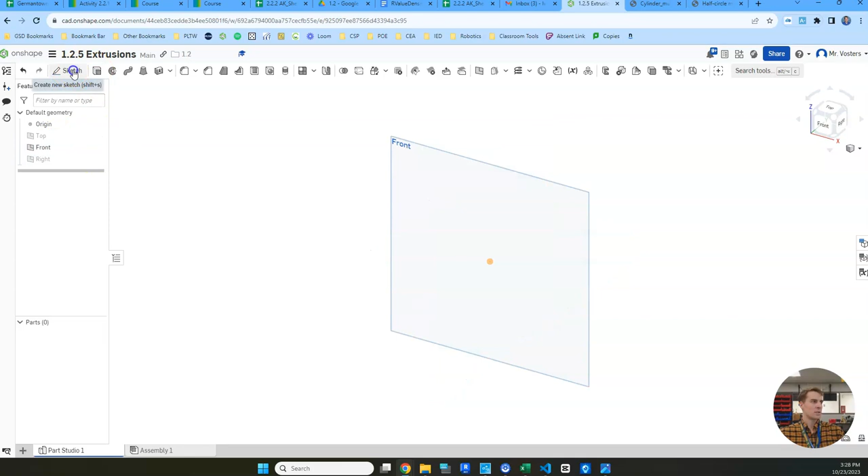I'll click up here, sketch, and we're going to do that on our front view. I'll go ahead and hide the front view now, and turn our view cube towards the front view. From here, let's jump back to our dimensions. We're going to draw a rectangle that's 2.25 tall and 0.5 wide, so it's only going to be half of our diameter, and you'll see why in just a second.

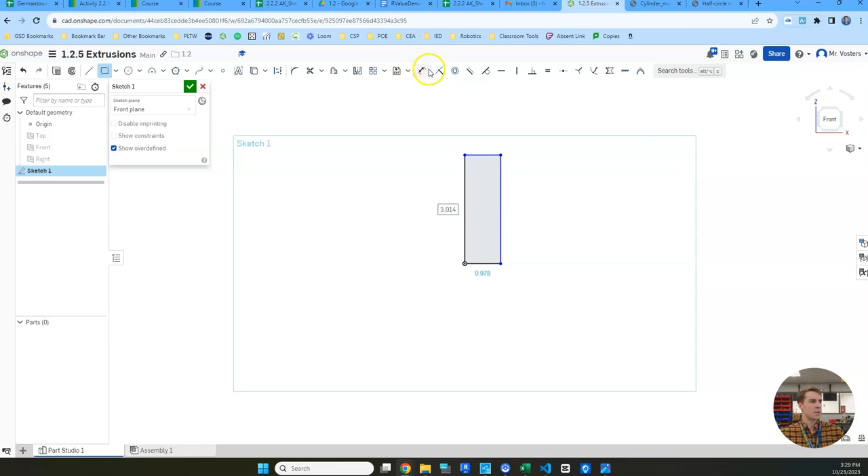So we're going to do a corner rectangle from the origin. We want it to be 2.25 tall and 0.5 wide. I need to find my dimensioning - we're going to dimension this to be 0.5, and the height is going to be 2.25. Let's double check that: yep, 2.25 tall, and we want half of this 1 inch, so half an inch, which you can see right here.

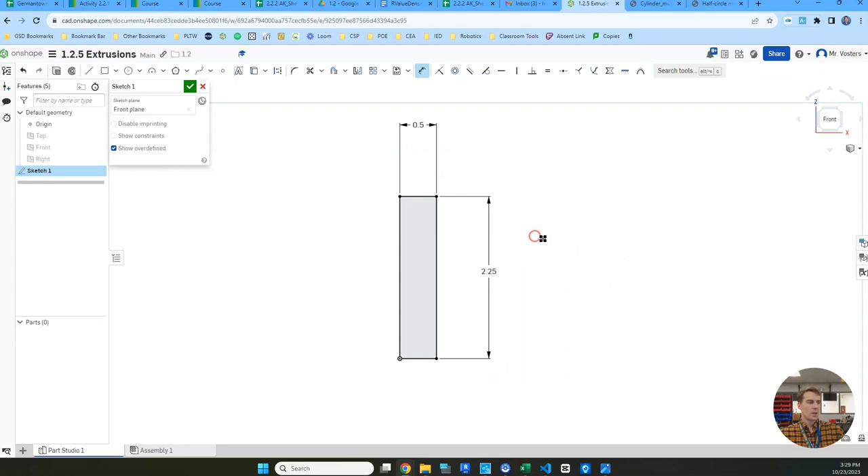From here we're going to go ahead and click Done. If we go to our isometric view, remember that's Shift 7 on your keyboard, or you can use the view cube to spin to this corner, whichever one you prefer. We've got our little rectangle, and if I rotate, you can see it's just two-dimensional, so it doesn't have any depth.

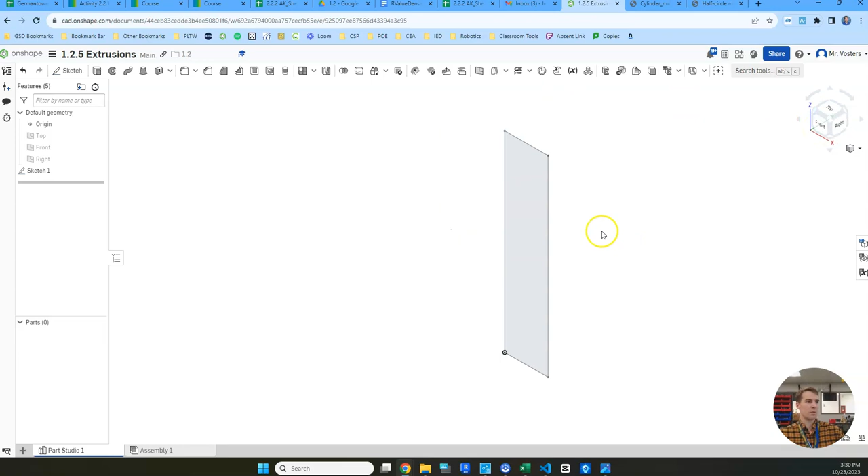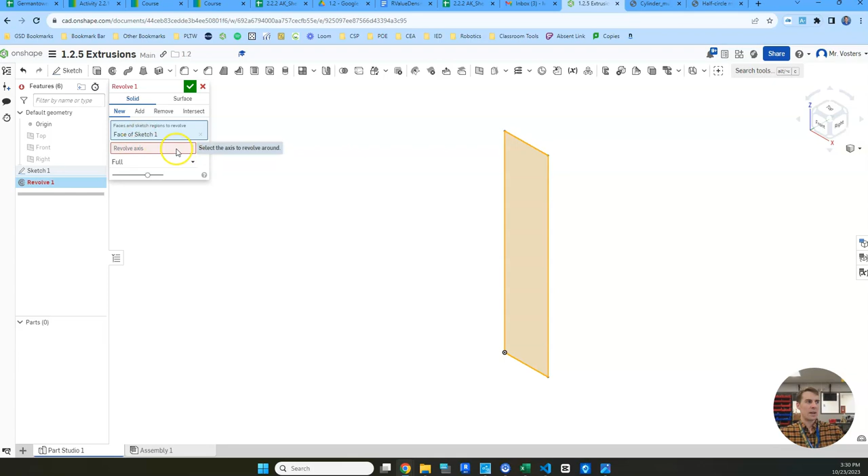So you're probably wondering how you're going to turn a rectangle into a cylinder, and that's using this revolve tool - that's Shift W, or you can click on the little symbol in the top left here, right next to your extrude. From here we're just going to click on the face that we want to revolve, then it's going to ask us to select the revolve axis, so we click over here, and we can revolve it around any of these sides of our rectangle. We want to revolve it around the one on the left that's going through the origin, and you'll notice when we do that, we do get a cylinder as a result.

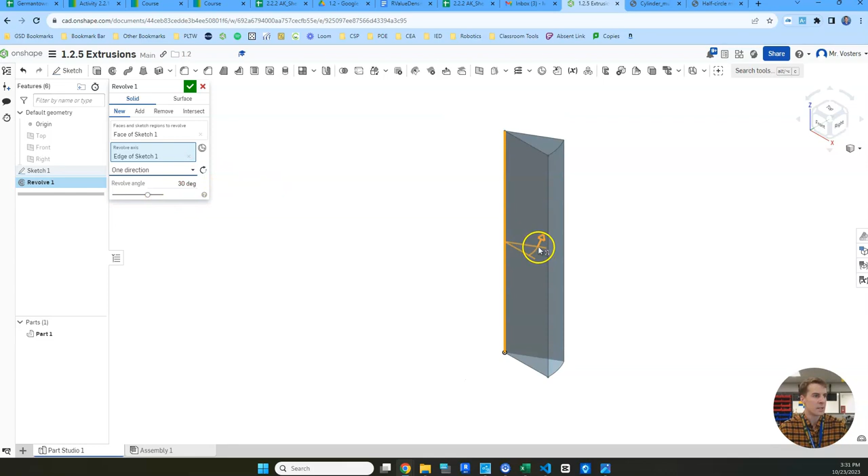So let's break down what's happening here. We've got a couple different options for a revolve. Right now it's a full revolve, meaning it's doing a full revolution around that axis. If we go one direction, this might help you see it better - starting with like 30 degrees, we can see we just have a little sliver of a cylinder. As I increase the amount of degrees, you can see that rectangle is being rotated around that middle, which is really the left side of the rectangle, and it's creating a three-dimensional shape, which is a cylinder.

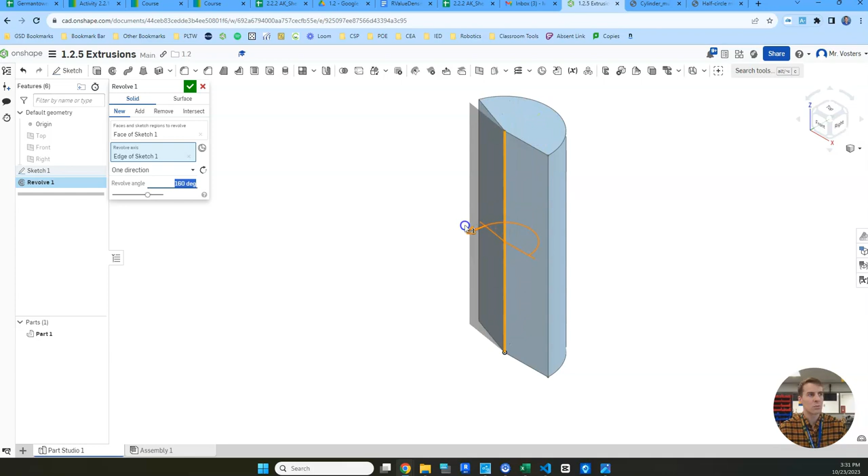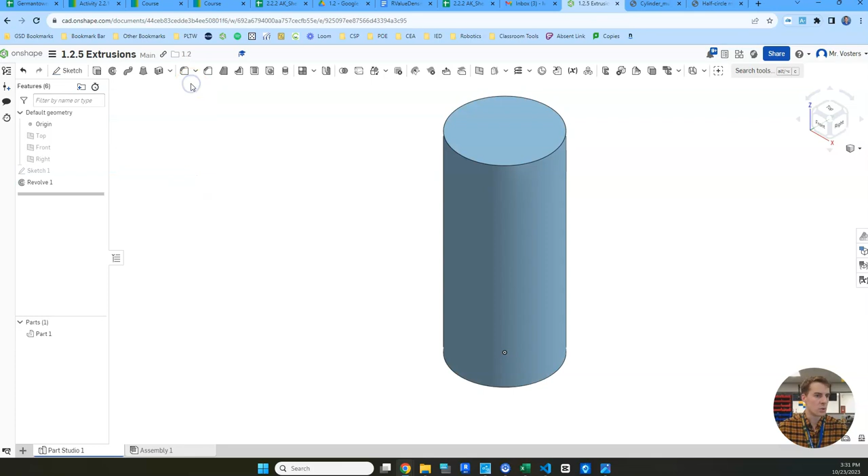As we increase the amount of degrees all the way up to 360, and I can type that in, it's going to close it up for a full cylinder, or I can just switch it back to the full option. Either one will do the trick, and we can click our green check to complete it. So we have our cylinder, nice and easy - a little bit easier maybe to do it the old way, but...

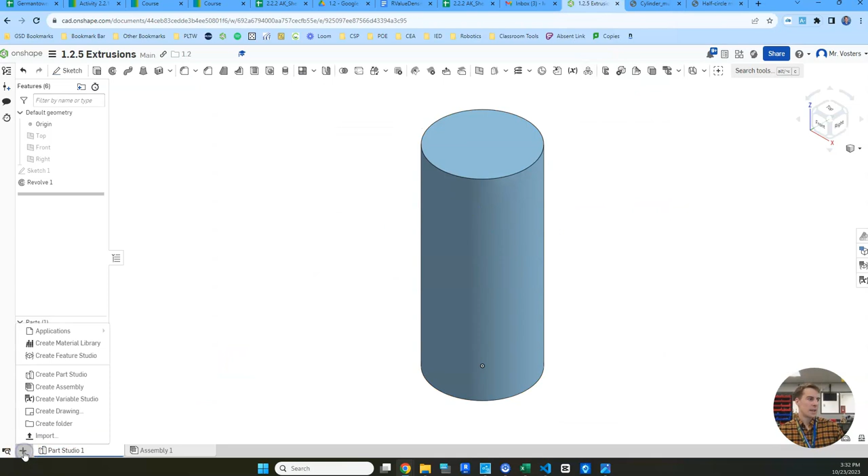There is another shape I want to create - now that's the half circle. This one should be also fairly easy to do with the revolve, maybe even easier than the original way that we did this one, where we had to extrude a circle and then cut the bottom half off with a rectangle. So I'm going to create a new tab - we're going to create a part studio, and that's going to be our half circle.

While that's loading, we need to think about the technique we're going to use here. What I'm thinking is we create a rectangle that goes flat, and then we can revolve it around this axis, which is the left side of our rectangle, in a circular pattern, half of a circle, or 180 degrees.

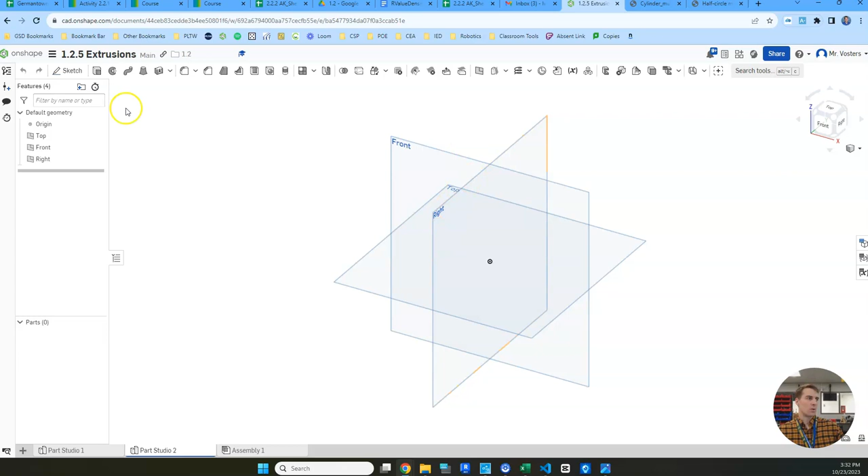Let's hide our front and right views. We said we were going to do a rectangle on the top view, so I'll do sketch, click on that top view, the top plane, hide the top plane, and then start on our sketch. I'll orient the view cube to look at the top, and we're going to create a corner rectangle.

I'm just going to make it a nice rectangle shape. Our dimensions for this one: it's going to be 1 inch tall, and then half of 0.75. You may not know that calculation right off the top of your head, so I'll show you a little trick you can use in OnShape.

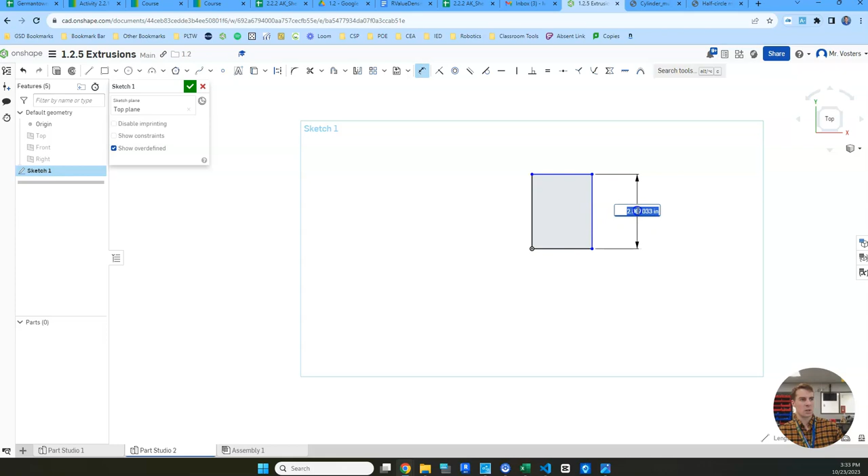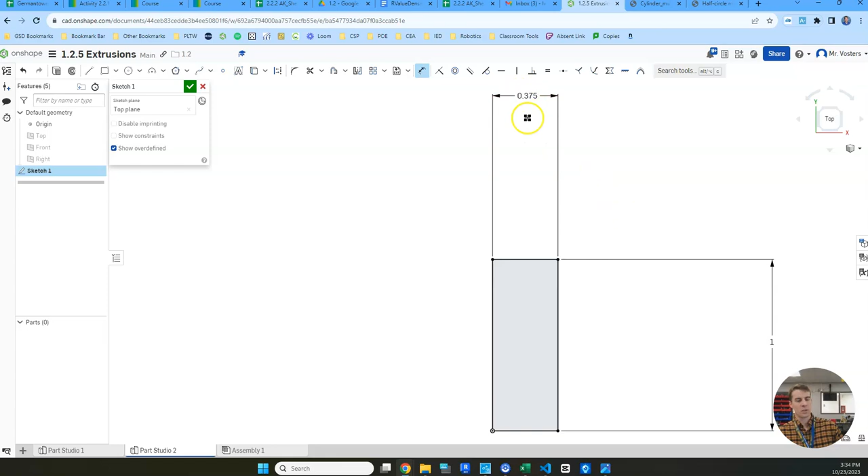We said it was 1 inch tall, and then half of 0.75, so we should be able to do some math in here. If we do 0.75 divided by 2, using the forward slash as the divide symbol, it should automatically update to calculate that number, which is 0.375. That's a nifty tool you can use if you don't want to do math or pull out a calculator. OnShape will do the work for you.

So we've got our rectangle the way we want it. Let's finish our sketch and go to our isometric view. We can see we've got our flat rectangle, which should be imitating this little section here, and as we revolve it, we should see a half circle emerge.

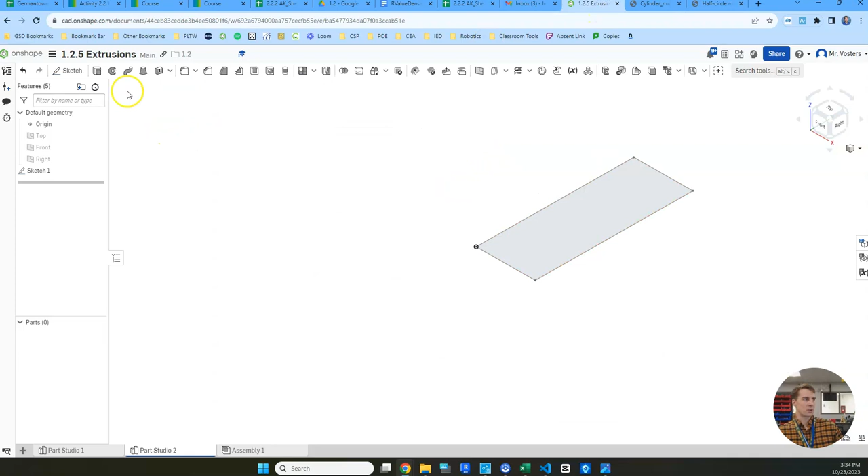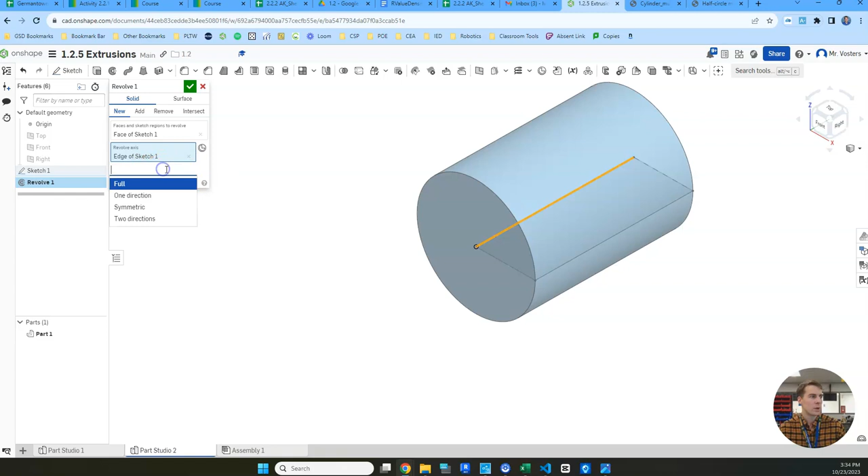I'll click revolve, and then click this rectangle since that's what we're going to revolve. Now you might be wondering why you can't click that edge - you need to click this first. Click where it says revolve axis, then you can click it, and right away it's going to default to the full revolve type. We want to update that to be just one direction.

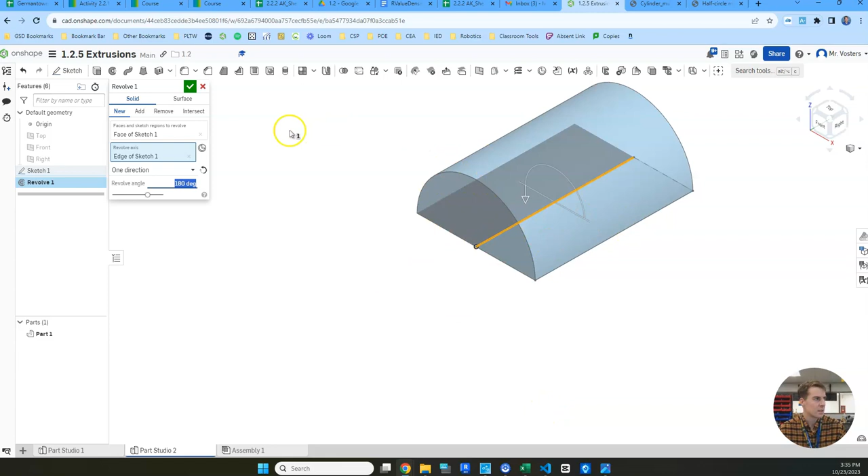I'll show you that you can drag that arrow, but it's usually not going to be super precise. You can see over on the left side, it's really close, 182. We're going to just type that in as 180. It'll auto update in the sketch area, and it looks good. We'll click the green check to make sure that's done, and we are good to go here. Looks like we did a pretty decent job.

Just kidding, we didn't. This was my mistake - as I was looking at this, it's not giving us a diameter, it's giving us a radius. So this will give me a chance to show you something else that's kind of neat about OnShape. Not the end of the world, we can fix this really easily.

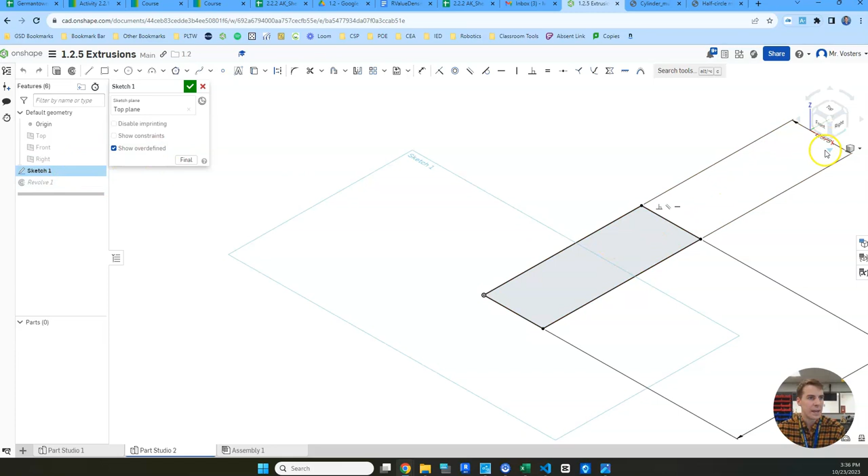Our radius is 0.75, so we didn't need to divide it by 2. What we can do is go back into our sketch - all I did was find it over on the left side and double click it. Now we can update this dimension: instead of 0.75 divided by 2, it's just going to be 0.75. Hit enter, and then when we hit the green check, I'm predicting it will update our revolve accordingly.

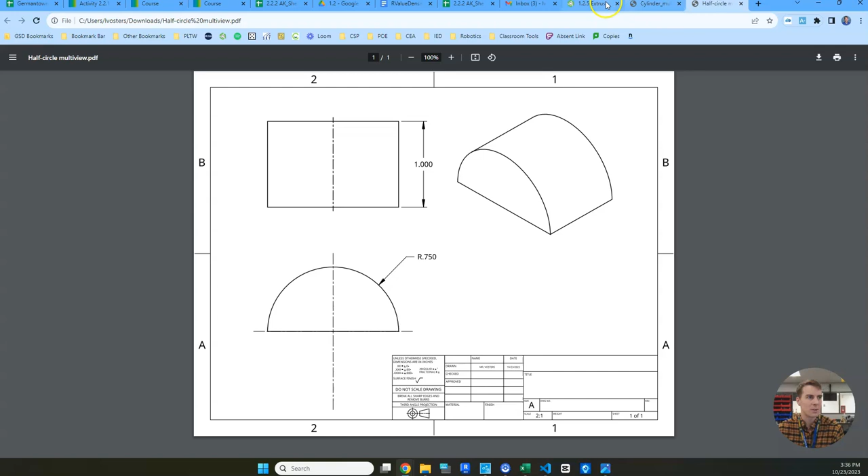And it looks like it did. Let's compare it to this one - it looks a lot better. Before it was not looking the same; it was much too deep for how big it was. So I can hit redo to put that back in place, and it looks good.

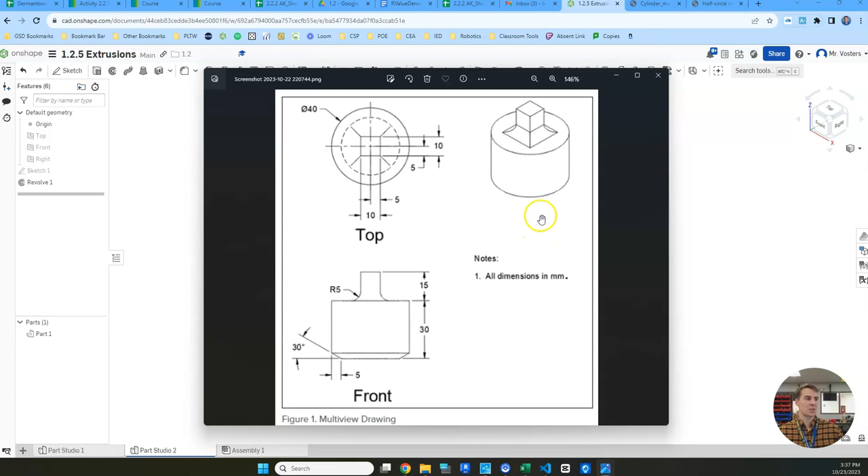So I'm going to stop this video right here. Now you've seen the revolve tool a little bit, and I'm going to show you a couple other tools in the next video that will help you create this shape right here. This is what we're going to work on in the next video. It looks a lot more complicated, maybe a little intimidating, but we will do it step by step together. Watch the next video for instructions on how to do this one. Thanks for watching, I will see you in the next video.